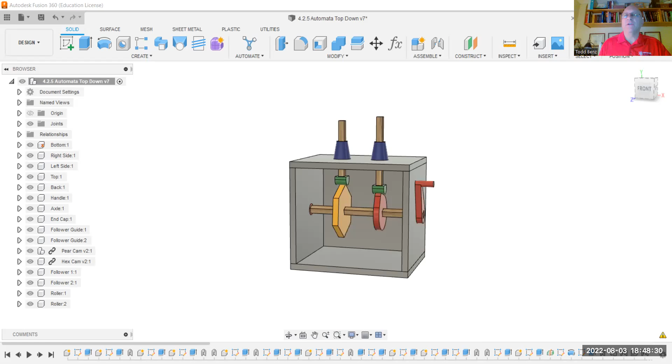So let's get started. I'm going to make a new project, new design. First thing I want to do is hit save, and give this a name. We're going to call it 4.2.5 Automata, and I'll give it a 2 after it because I already have one.

Now I want to create my first component. I'm going to go up and hit create component. My first component we want to give a name to, we're going to call it bottom. We'll hit OK, and I'm going to go to new sketch.

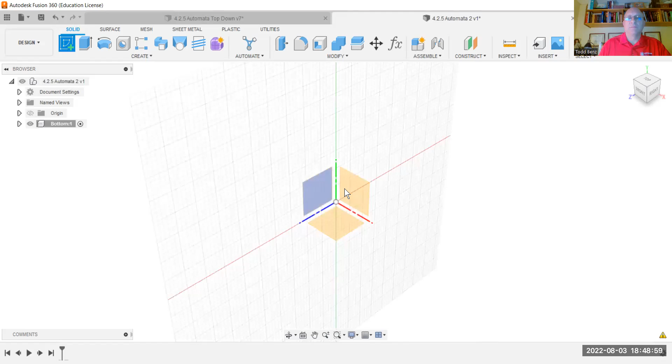I'm going to pick my plane and make a rectangle, starting right at my origin. I want my rectangle to be 5 inches wide, and 0.25 high. Once I'm done with that, I'll hit finish sketch.

I'll go over to extrude, grab that piece, and I want to take that back 4 inches. All right, I'm going to slide that over in the middle a little bit, get a little smaller.

The next thing, if you notice on the left side, is my bottom piece is my active piece. I want to go up here and reactivate my top, but then come down to my bottom, right click and hit ground. I want to ground that piece, so everything rotates around that one piece.

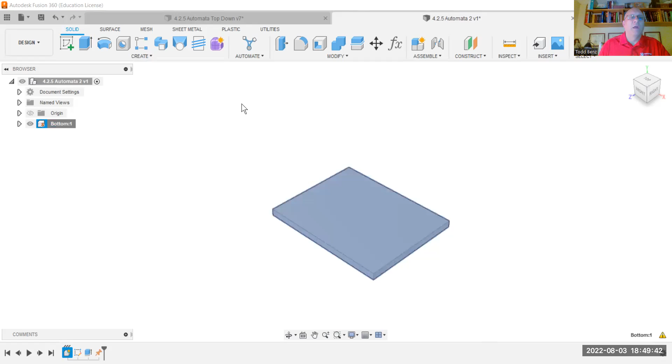Now that my top piece is active, I'm going to go up and make a new component. We're going to call this the left side. We'll hit OK, and go over and make a new sketch right on top here.

I'm going to make another rectangle, starting at the corner, making sure I start at the corner, and bring it straight down. I want it to be 0.25 wide, and make sure that it's 4 inches tall.

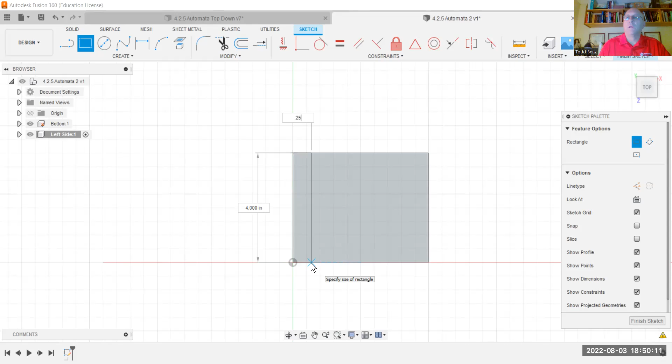I'm going to hit finish sketch, then extrude that piece up. I want that piece to go up 4 inches.

Next I need a hole in the side of this. Since I'm looking at this view, I'm just going to put a new sketch right on that side. What I'm going to do is make a line, and I'm going to grab construction. I want to make a construction line from the corner of that down to the corner there, then get out of construction mode.

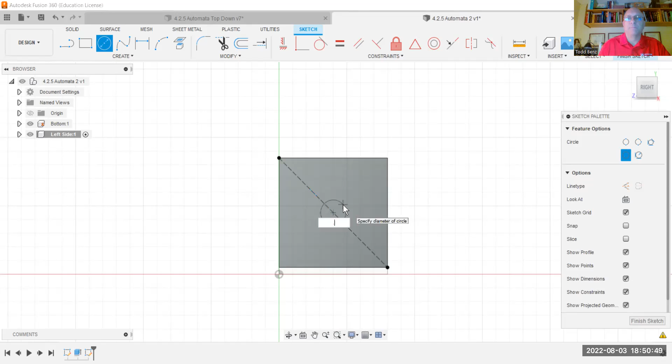I'm going to go to my circle, slide down until I grab the center point of that line, and make a circle of 0.5 inch diameter. I'm going to finish that sketch, then extrude that sketch. I'm just going to extrude it all the way out - doesn't really matter as long as it's over 0.25. And I'll hit OK.

Next thing I want to do is go up and activate my top component, click on my little white area. I want to make sure that these two are locked together. They're technically not locked together, I just use them to build it.

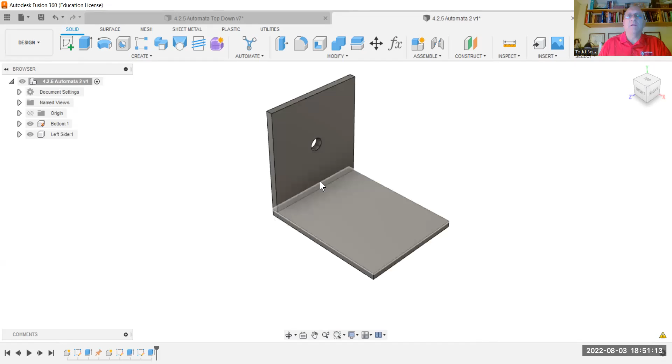So what I need to do is go up here to assemble, go to as-built joint, and click on my left side and then my bottom piece. I want to create a rigid joint here, so we're going to hit OK. So now these two pieces are locked in together.

All right, I'm active on my top level. I'm going to go over and make another component. We're going to call this the right side. I'll hit OK, and go back to sketch.

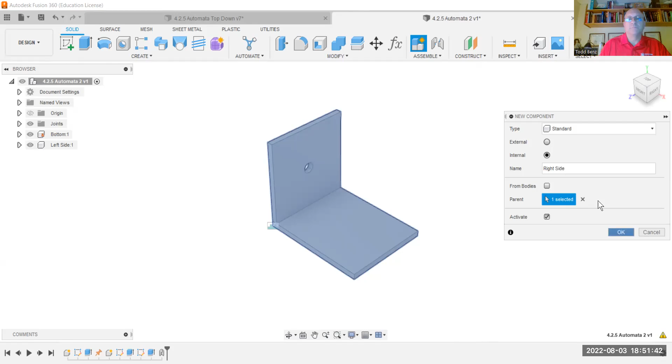I'm going to click on the top right here, top of that bottom piece. Again, I'm going to make a 2-point rectangle starting at the corner and bringing it down. I want it to be 0.25 wide, and make sure that's going to be 4 inches tall.

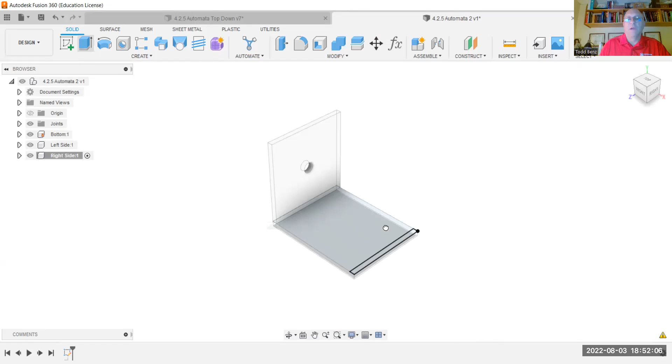We'll hit OK, I'll finish my sketch, and go to extrude that piece. I want to bring that up 4 inches, and hit OK.

I would need to put a hole in this side also, so I'm going to put another sketch on that side. Again, I'm going to make a line, get a construction line, and start from one corner, go down to the other corner. I'm going to make a circle right at the midpoint of that line, and again I want that to be 0.5.

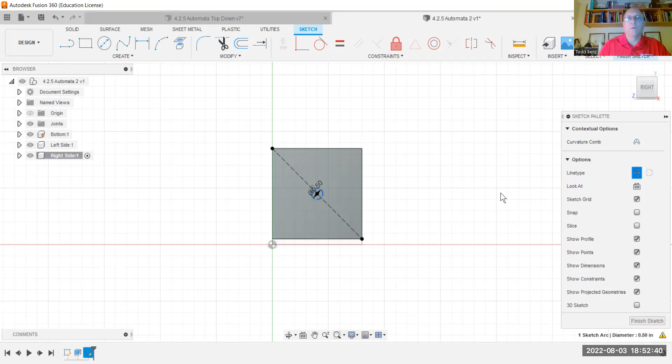Since I forgot to take it out of construction mode, all I have to do is click here, take it out of construction mode, and click my circle. There we go, and now my circle is out of construction mode.

Next thing I want to do is make sure I extrude that out. So we'll finish our sketch, go to extrude, grab that circle.

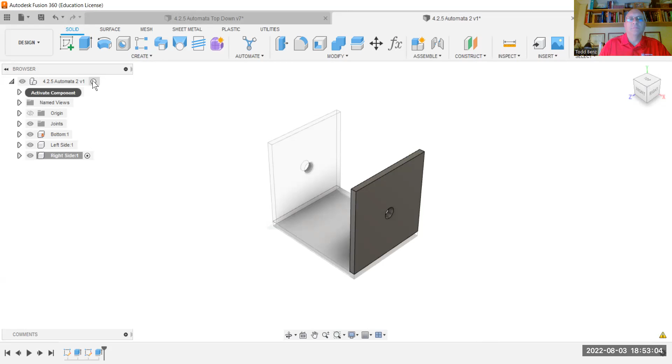I want to go back up and activate our top level. I want to put another as-built joint on the right side and that bottom piece, and I'm going to make sure it's rigid and put it in there.

All right, we need to put another top piece on. My top level is activated, checking it out. I'm going to go assemble. We're going to make our top piece.

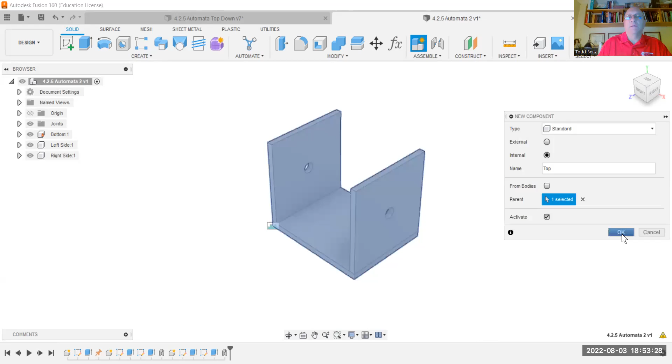I'll select OK. I'm going to go to a new sketch, and put my new sketch right on the top right here. I'll zoom out so you can see what's going on.

I'm going to make a 2-point rectangle, but I want to be able to grab this corner. So before I choose 2-point rectangle, I'll go to create, down to project and include, and slide over to project. I want to either grab that line or that point, either one will work, so I'm going to grab that point. I'll hit OK here, then go grab my 2-point rectangle.

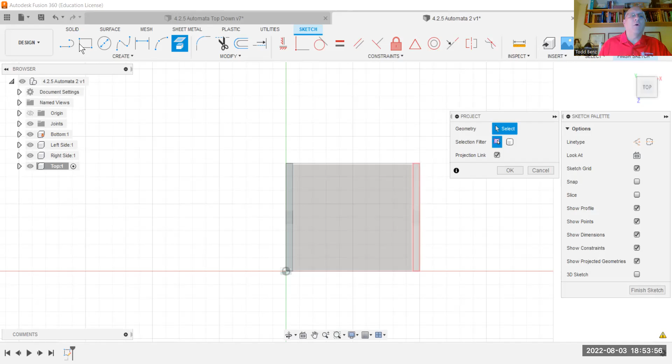I'll start at the corner here, bring it down to the corner there, and finish that sketch.

I need to extrude that sketch, and also make sure I grab that little piece over there. I want to bring those both up 0.25.

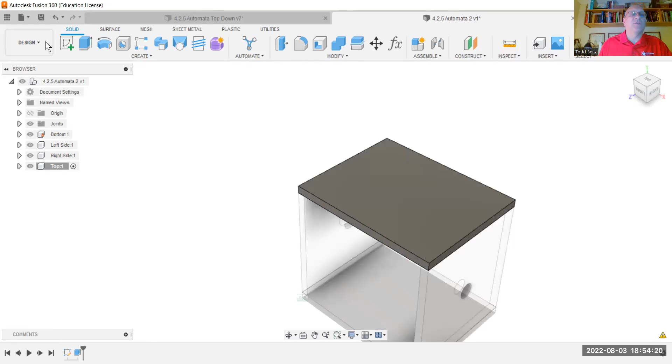Okay, I'm looking good so far. I need to put some holes into my top piece, so I'm going to do a new sketch right on the top and have it look at me.

I'm going to make a line again, a construction line, starting right at the midpoint here, and drag it over to the midpoint here. Then get out of construction mode.

I'm going to make 2 circles, putting one here and one here. Now I need to dimension those circles.

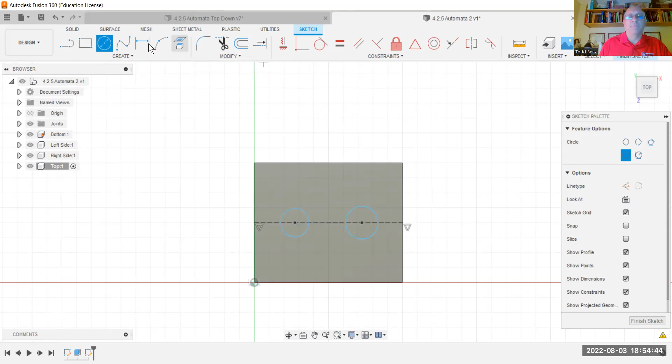So I can go to dimension. I want those circles to also be 0.5, and I want both of them to be 0.5.

Now I want to dimension from the edge. I know my piece is 5 inches wide and I need to put 3 spaces in there, so I'm going to dimension from this edge to the center of my circle and type in 5 divided by 3.

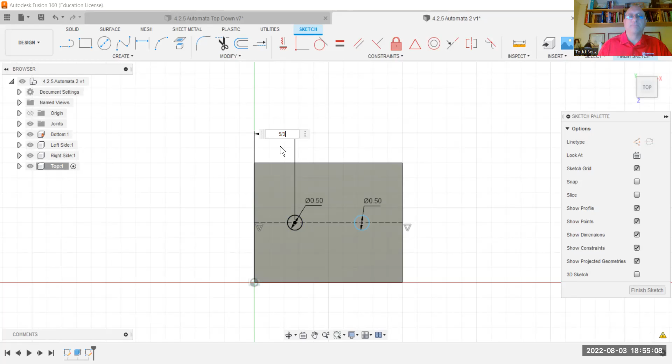I'm going to do the same thing on the other circle. This edge, I can put 5 divided by 3. And there I go, I can now finish that sketch.

I can go to extrude, grab both those circles, cut them down, and cut them in 0.25.

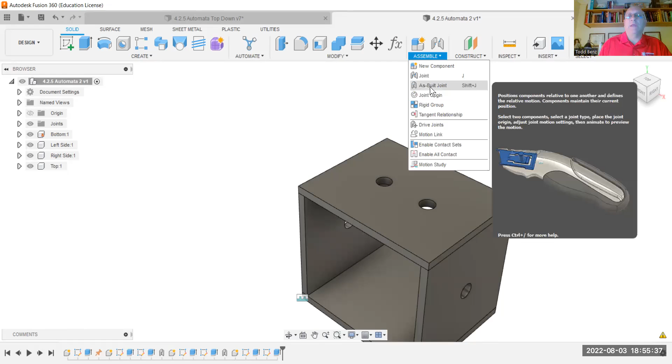I'm going to activate my top level, and now what I'm going to do is go up to my as-built joint again. I'll select my top and select my left side, make sure it's rigid, and hit OK.

The last thing is I needed to put the back piece on. So I'm going to look at the back, making sure I'm in my top level. I'm going to make a component and call that back.

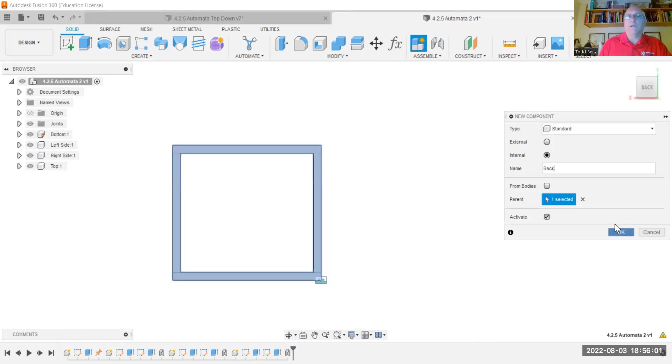Select OK. I need to put a sketch on, so I'm going to grab this side here.

Now I also need another point down here to draw. So again, I'm going to go back to project, and project that corner point down there. If I can grab it, if not, I'll just grab that side.

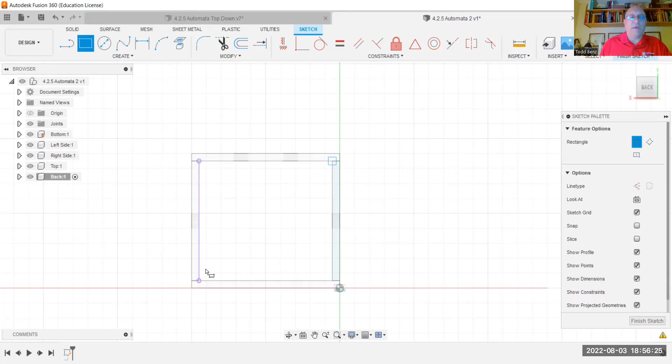I can make a 2-point rectangle, starting from this corner and dragging it down to that other corner. Okay, don't have to put any dimensions in. I'm going to hit finish sketch.

I'm going to go back and view this a little bit at an angle. I'm going to go extrude that piece. I want to take it inward, so I want to drag that in.

Let me grab it again, and I want to take it in 0.25.

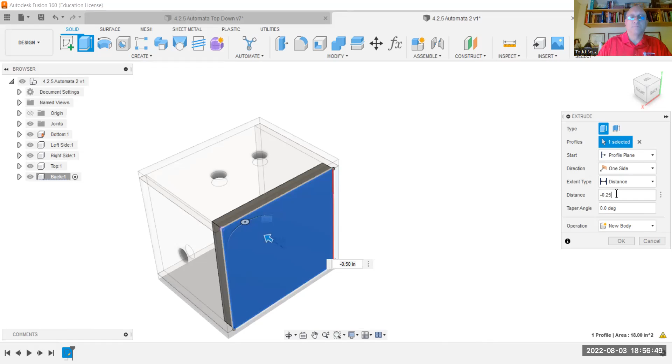I'll go and activate my top level again, and I need to put one more as-built joint on. So as-built joint, my back piece, and I can grab my left side over here. It's a rigid joint. I'm looking good.

I like that, and I can put it in my home view. And that is how you build your Automata box, the first of several videos.